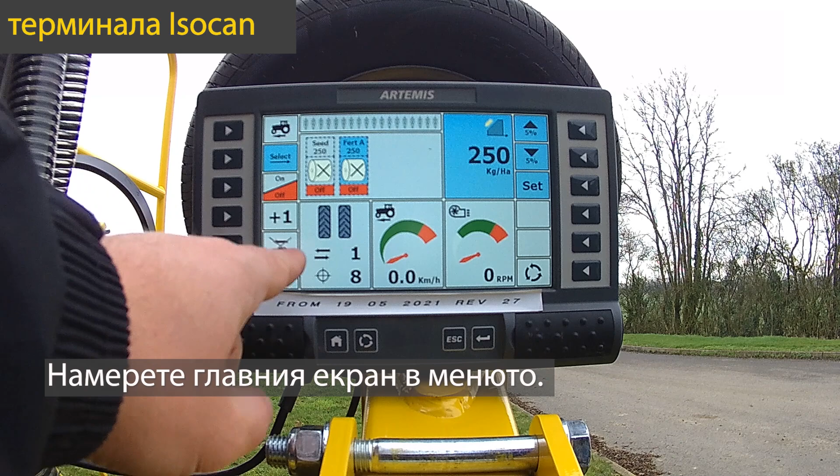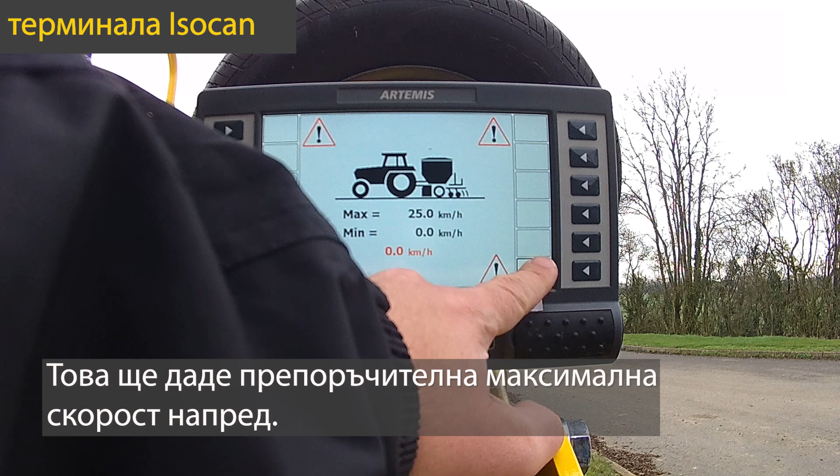The calibration process begins with inputting your seed rate into the ISOCAN task controller. You need to find your main farming screen, and on the top right corner of the screen you will set your required seed rate. We will be drilling 185 kilograms per hectare, and this will give you a recommended maximum forward speed. You need to press OK, and now you can start your calibration process.

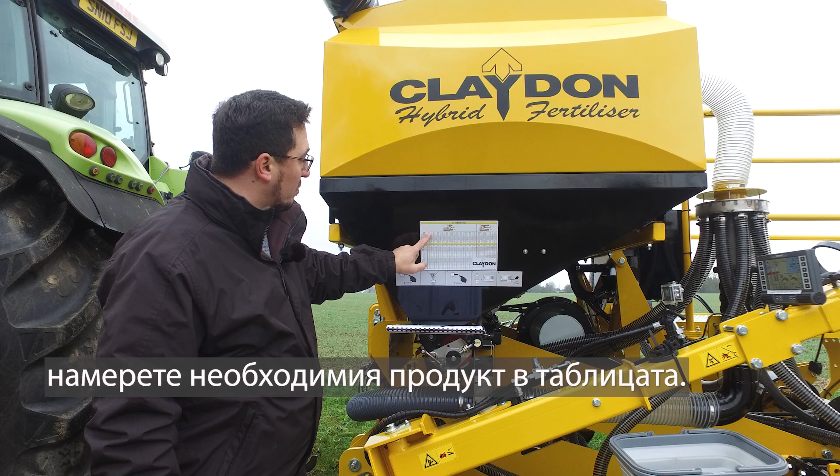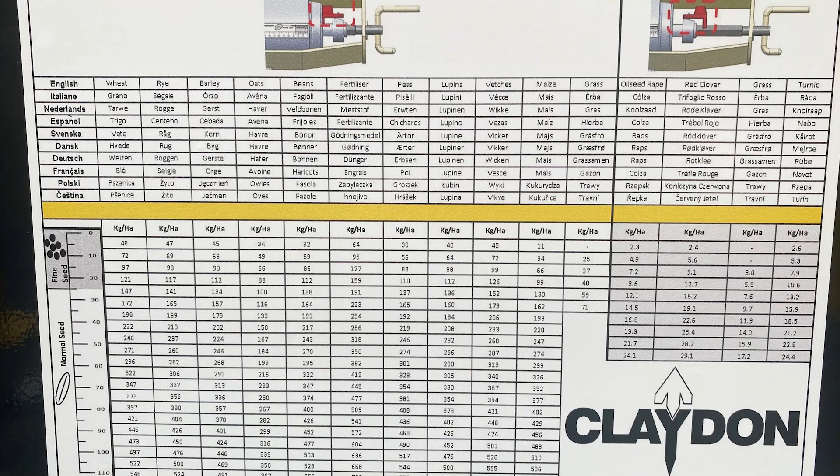After setting the required seed rate in the ISOBUS terminal, find the required product on the chart. On the decal located on the side of every single hopper, you will need to find the product that you're drilling, find the seed rate that you're drilling, and adjust your metering unit to the required depth. This chart is also available in your operator's book that comes with every single machine, and if you require a hard copy you need to contact your local dealer, or please visit our website and download it for free.

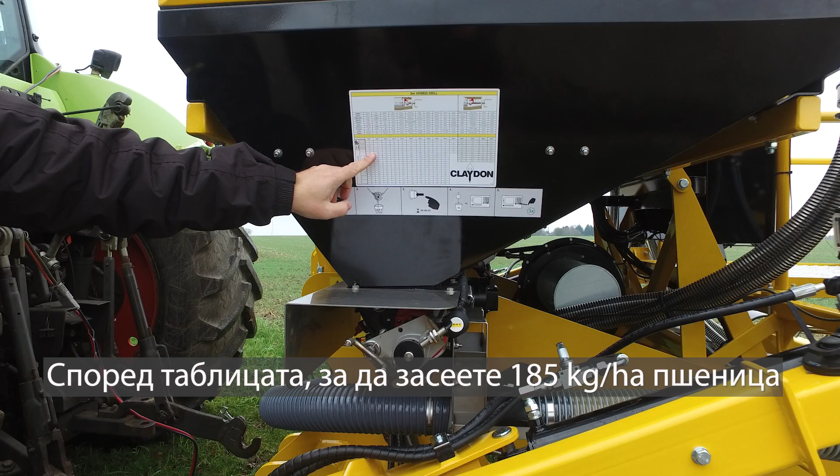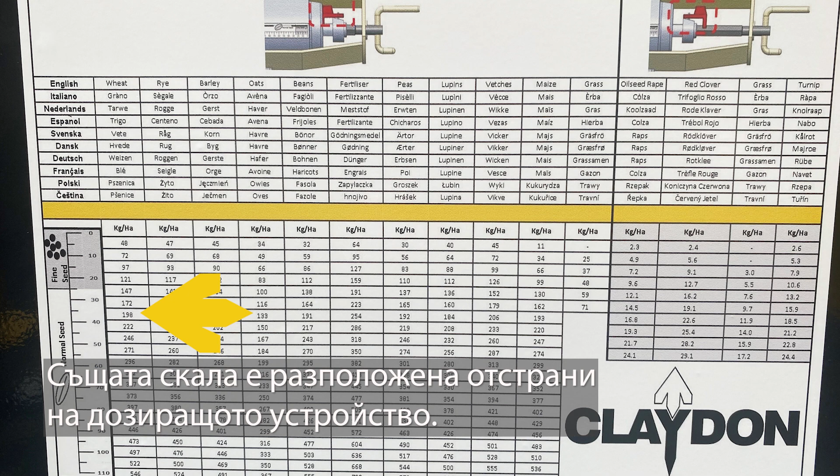So our table says to do 185 kilograms a hectare of wheat, you need to open your metering unit up to about 35 to 40 millimeters, and the same scale is found on the side of your metering unit, and you will need to adjust it to match the required seed rate by turning this fork in or out.

Before you adjust the metering unit, it's very important to remember that the metering unit must be free of seeds, fully empty, because if it has seeds in it, you can easily damage it, and unfortunately it's a very expensive replacement. To adjust it, you will need to move the fork in or out.

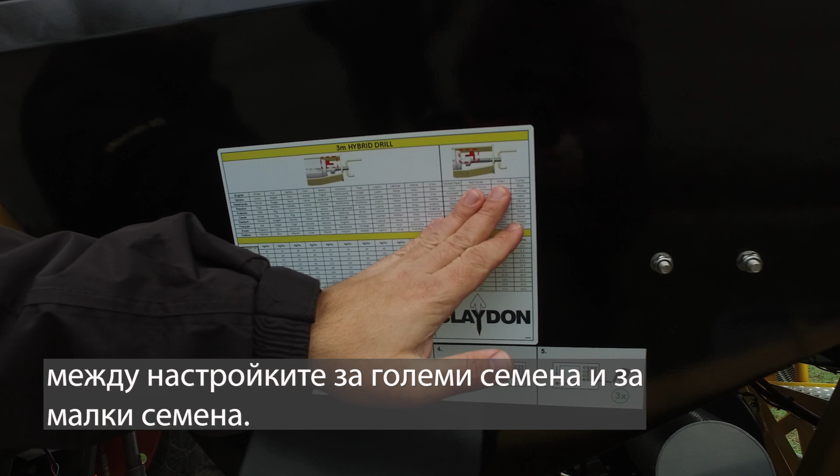We have two settings on the Claydon hybrid drills where you can adjust your metering unit between large seed settings and small seed settings. To change between large seeds and small seeds, you need to adjust your metering unit in all the way to 0 before you can change it.

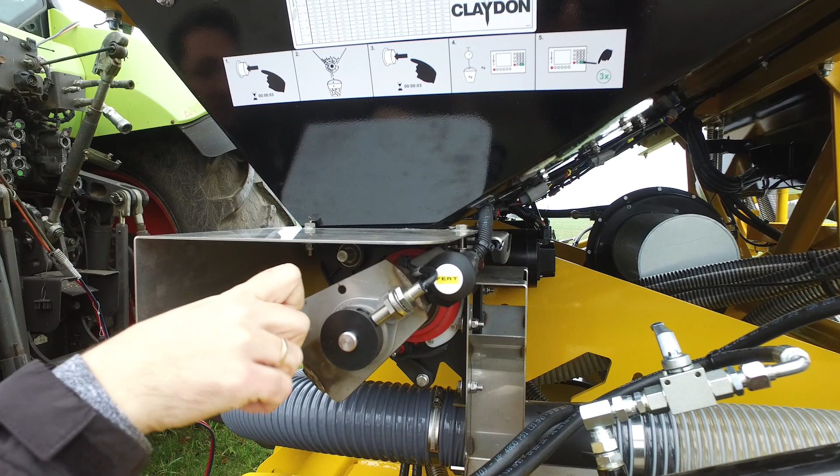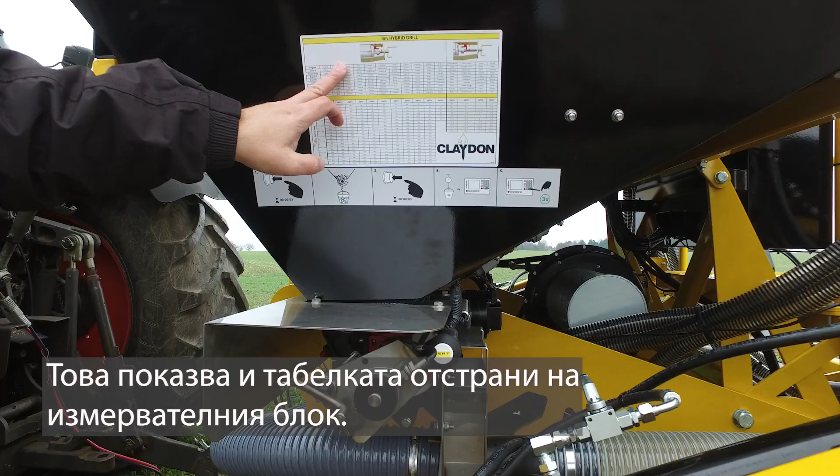You need to turn the small red arm on the inside to lock into the shaft. The decal on the side of the metering unit demonstrates this too: large seed settings, and the little red arm turned the opposite way around for small seeds.

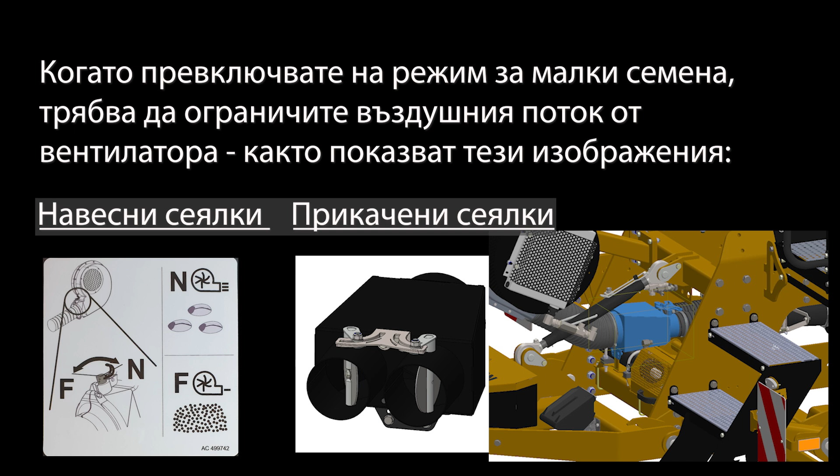It is very important that you always set your metering unit depth before you fill up your hopper with product, because you want the metering unit to be empty, as discussed previously, because you don't want to damage the metering unit by adjusting it in when you have product inside.

Some of the hybrid units, like the seed and fert drill, will have a shut-off plate to overcome this. But the seed-only mounted machines do not have a shut-off plate, so as soon as you put product in the hopper, you have product in your metering unit and you cannot adjust this. The same sticker is also found in your operator's book, where you have a step-by-step guide on how to do your calibration properly.

After adjusting the metering unit depth, you will need to open the shutter plate on the bottom of the hopper to allow seed to flow into your metering unit.

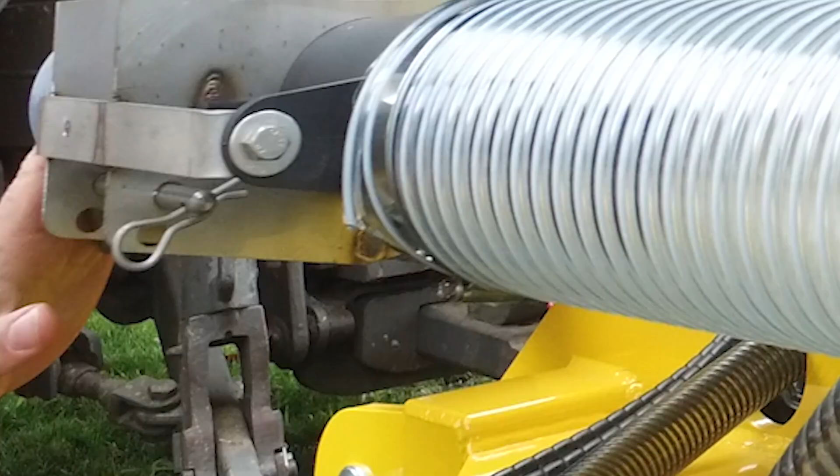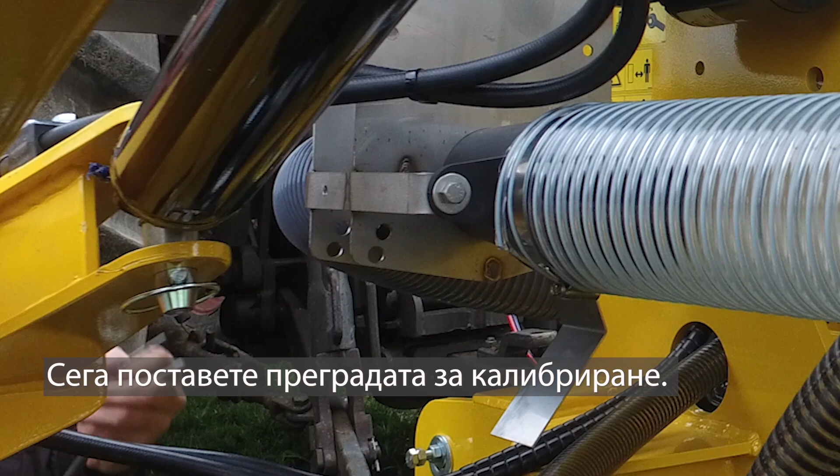We now have seed in the metering unit, so the next step is to open the calibration hatch and fit the calibration tongs. The latch is secured by the secure pin, which is secured by the linch pin. Remove the linch pin and the secure pin, and the latch opens, and now you can fit your calibration tongs, which only fit one way. The calibration tongs are now fitted into the correct position, and we can now secure it with the secure pin and its linch pin.

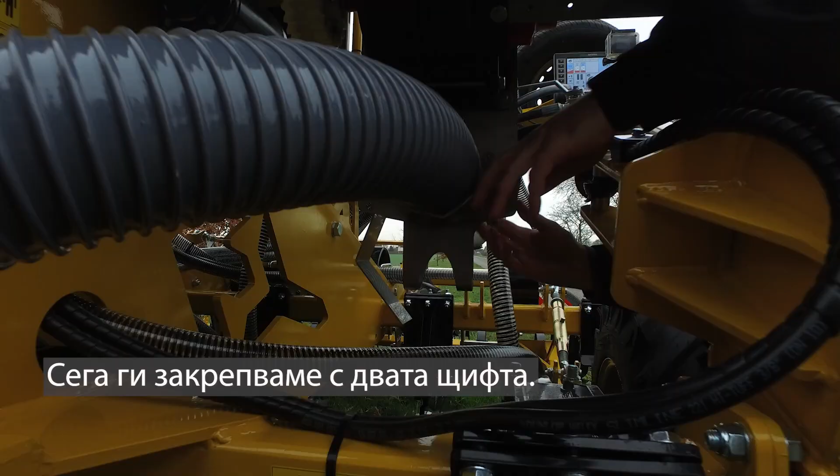Before you can run the first calibration test or bucket test, you need to purge your metering unit, which means you need to make it turn around one whole rotation to make sure that it's full of seed all the way from top to bottom, to make sure that your first calibration is accurate. To start the calibration process, you need to press and hold the calibration button for 3 seconds. This will activate the calibration in your ISOBUS terminal as well.

It has done a whole revolution. So the next step is we need to cancel the calibration process or the purging process on the screen by pressing escape, and you need to empty your calibration bucket.

Before you do your first calibration or bucket test, you will need to weigh your calibration basket or bag, and you will need to tare your scales to make sure that the weight of the basket will not intervene with the weight of your sample, and your calibration will be accurate. Don't worry if your scales turn off in the meantime whilst you do your calibration, it will still remember the weight of the basket.

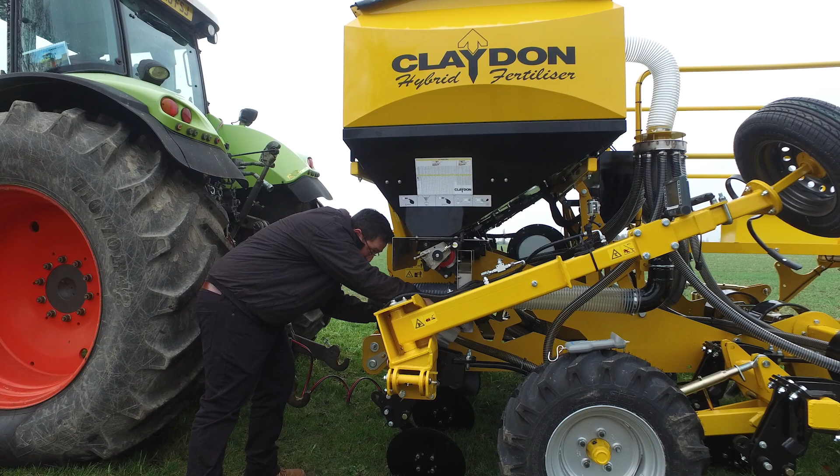Now you can start the first calibration process. Again, as before, you need to press and hold the calibration switch for 3 seconds, and that will start the first bucket test.

When you do your calibration, you need to allow for a decent size of sample, at least 1.5 kilograms when you do medium-sized seeds like cereals.

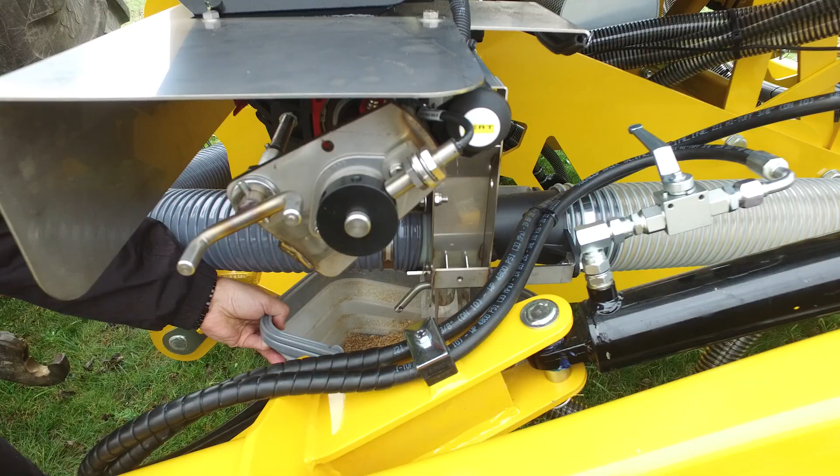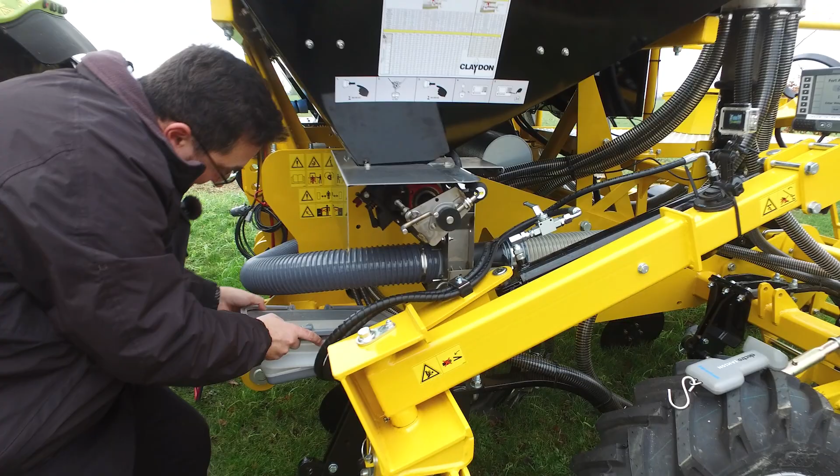We now have a good enough sample, so press and hold the calibration button for 3 seconds to stop the process. We now have a good enough sample in our basket, so we will now weigh the sample.

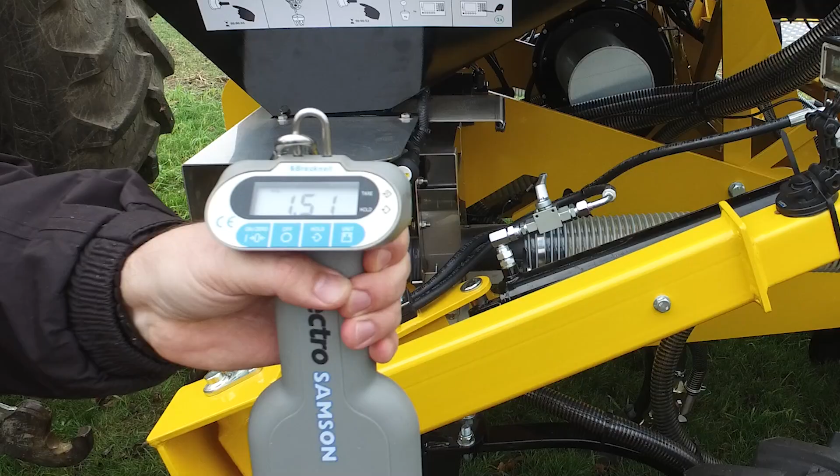Our scales show 1.51 kilograms. Now we need to input the weight. We need to choose the right measurement, grams or kilograms. We select kilograms and we input 1.51 kilograms.

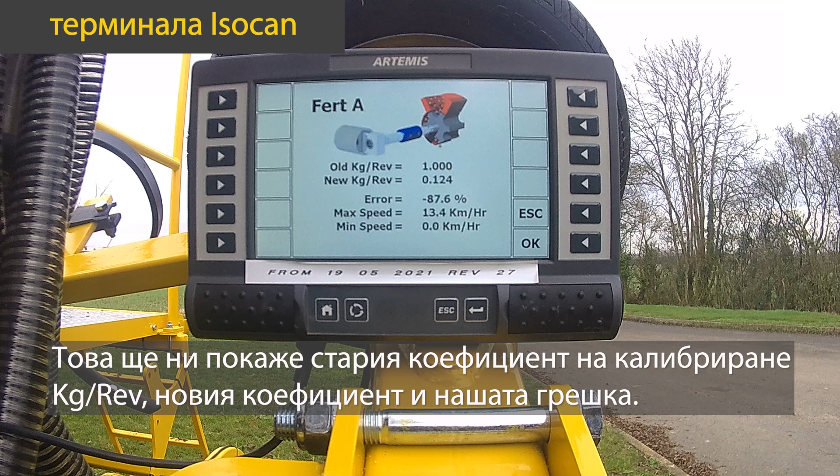And press OK. If we press OK again, that will show us your old kilograms per revolution calibration factor, the new one, and our error. Our error is 87.6%. We need to press OK to accept the error.

We can now go and start the second calibration test. You need to keep repeating the bucket test until you go below 3%. At least we recommend 3 times, but within 3 times, if you've done it well, you should be under 1% of error. Again, place your basket underneath the calibration chute.

Start the process by press and hold for 3 seconds. And we now can see that the metering unit has adjusted. It's flowing a lot quicker. We then press and hold again for 3 seconds.

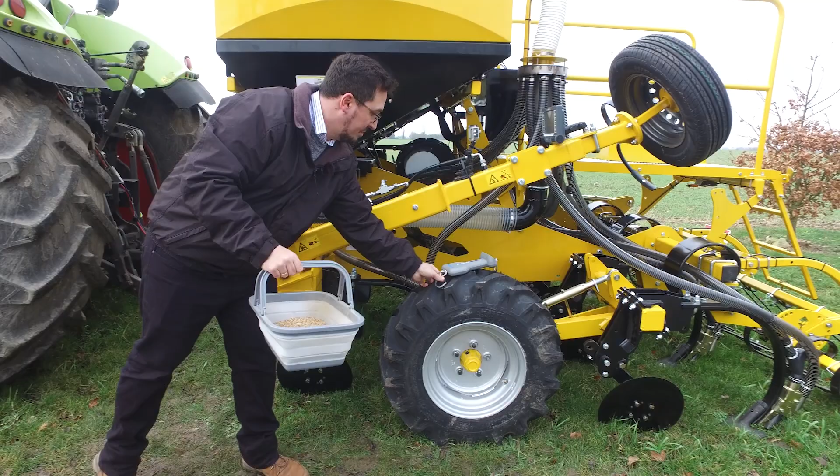Weigh our sample. It shows 2.27 kilograms, and this is the weight we need to input into the ISOBUS terminal. Again, on the screen we select kilograms, input 2.27 kilograms. Press OK, OK again.

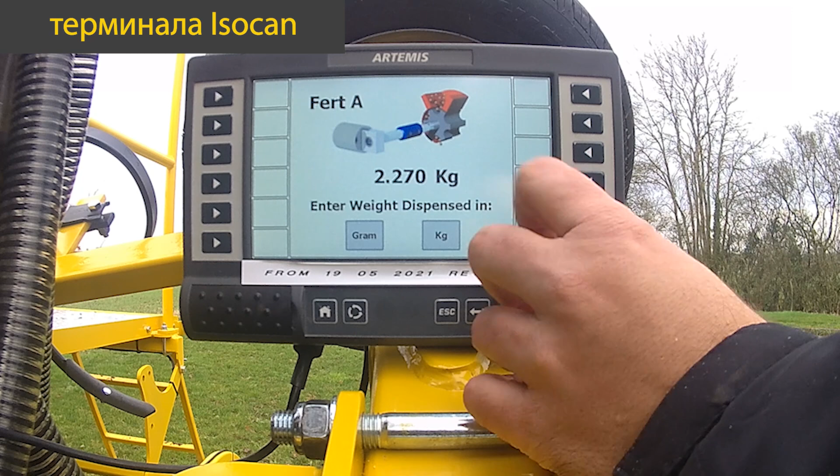And we can now see that the error is now 1.7%, and that is almost good enough. We can press OK to accept the error, and we will do a third run to make sure that is definitely good.

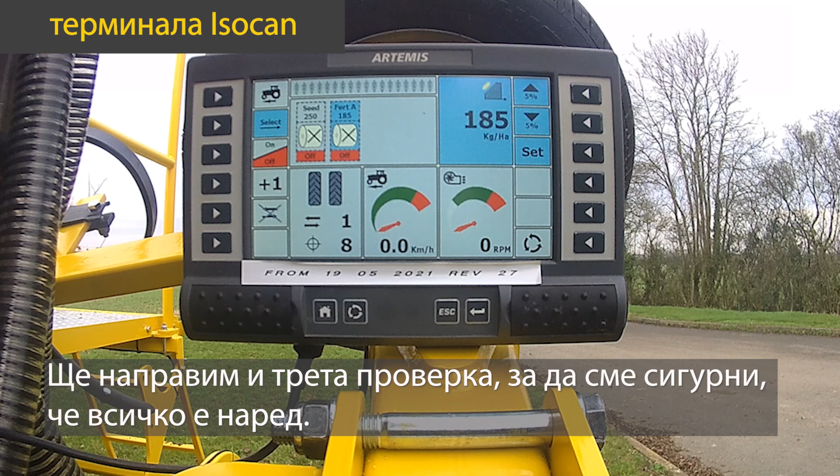The second calibration test brought us to a 1.7% error, which is already good enough to go and start our drilling. But we recommend that you always do 3 tests at least. So let's do a third run and see how we get on.

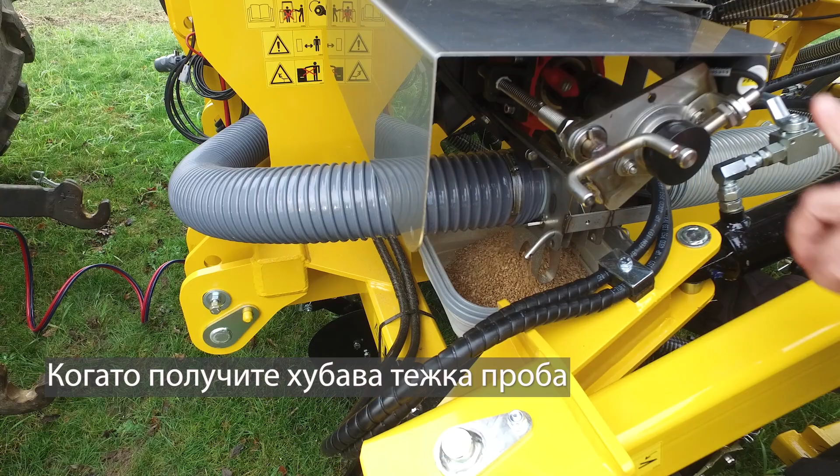Again, place your basket under the calibration chute, press and hold the calibration switch for 3 seconds. And when you have a nice heavy sample, press and hold the switch for 3 seconds again.

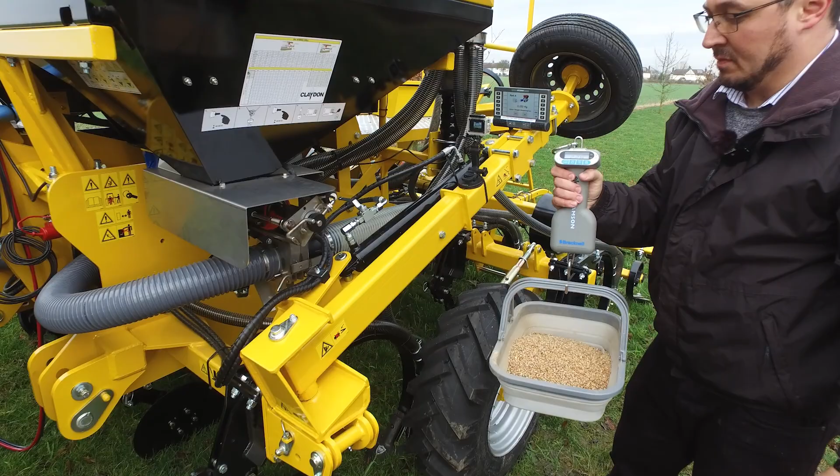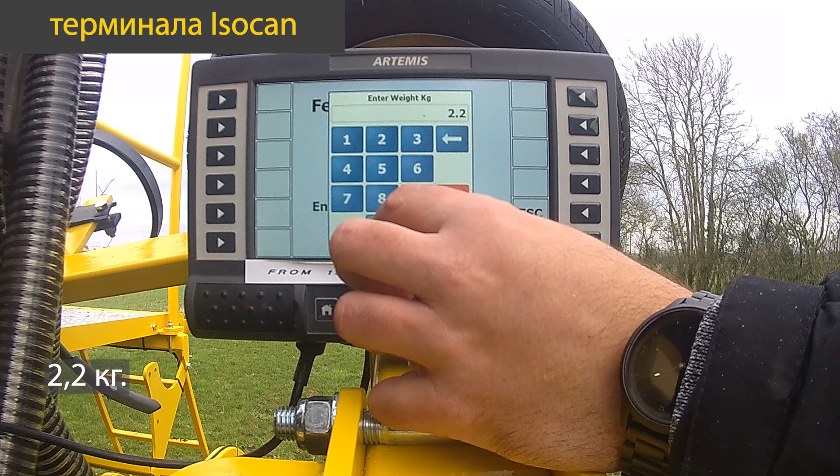Our calibration scales show 2.2 kilograms. Let's input that weight into our ISOBUS terminal. Again, select kilogram as before. 2.2 kilograms. Press OK again.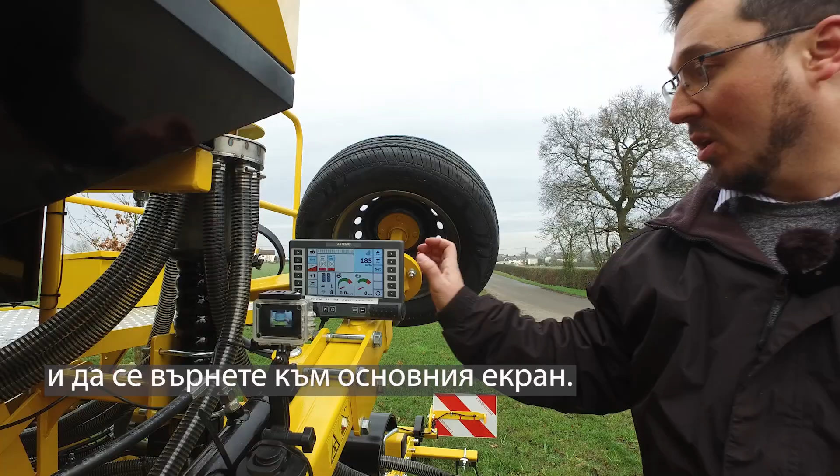So our error is now down to 1.5%. So we need to press OK to accept the error, to go back all the way to the main screen, and now we're ready to go and start drilling.

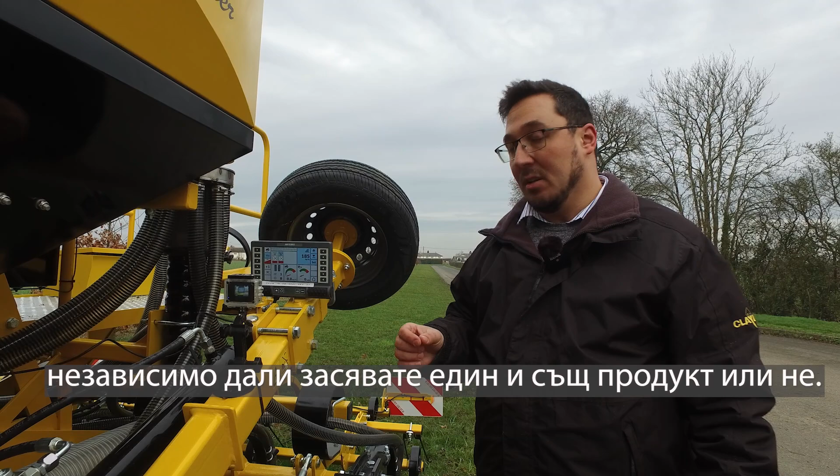We recommend that even if you drill the same product the following day, you need to do a calibration test every single morning at least 3 times, just to ensure that your applied seed rate will be correct and as accurate as possible. We now have completed the calibration process.